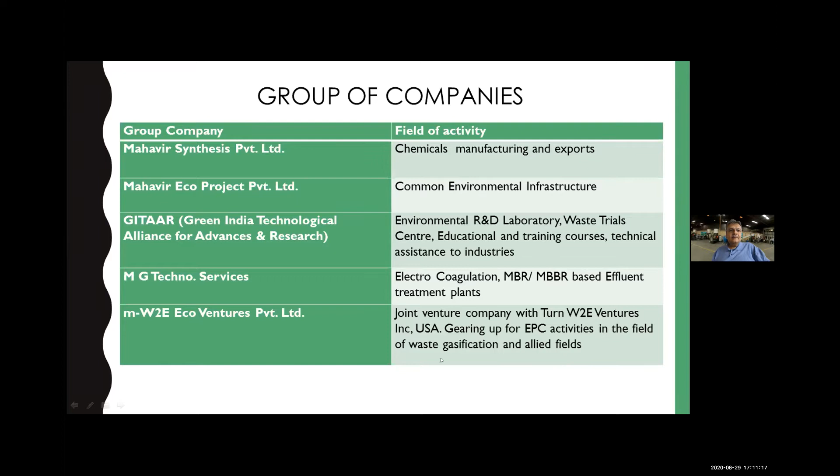Now, coming to MG Techno Services, WaterX is our brand under which we supply domestic sewage wastewater treatment plants, industrial wastewater treatment, and recycling plants. MG Techno Services basically deals in electrocoagulation based treatment as well as biological treatment technologies, which include MBR or MBBR.

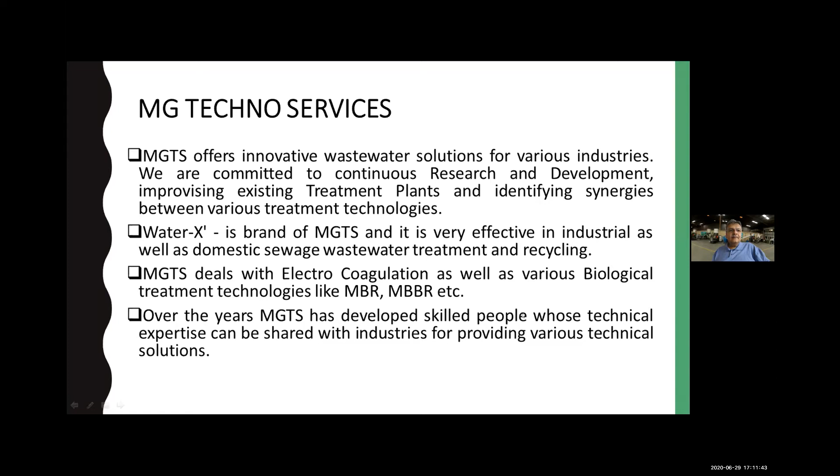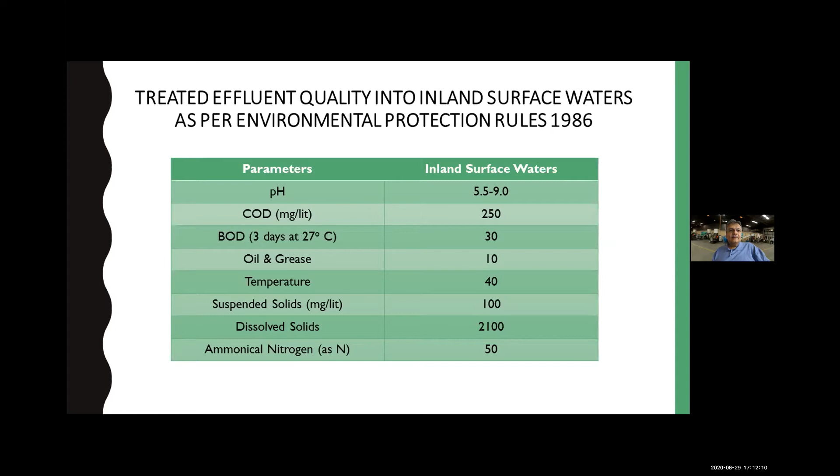Now coming to treated effluent, the statutory requirements for discharge of effluent or wastewater on inland surface. Major parameters are that pH should be in the range of 5.5 to 9, COD should be less than 250, BOD less than 30, oil and grease less than 10, temperature less than 40, and so on. We have to achieve these norms if we want to discharge our effluent on inland surface. These are pictorial views of ETPs which we supply to our customers.

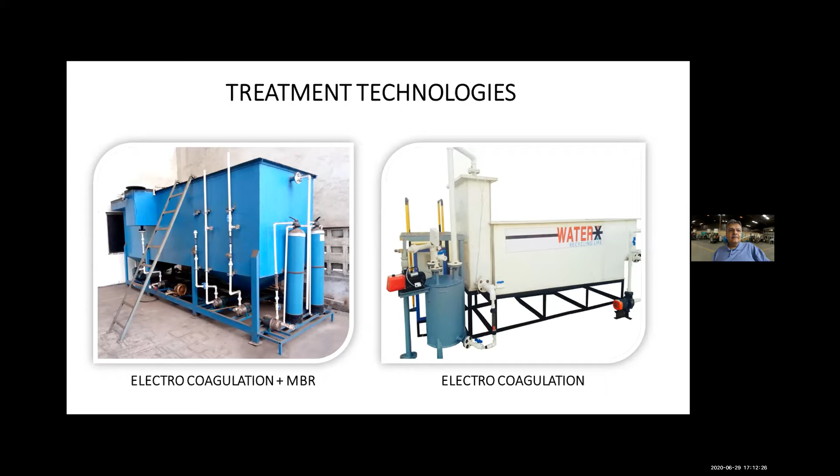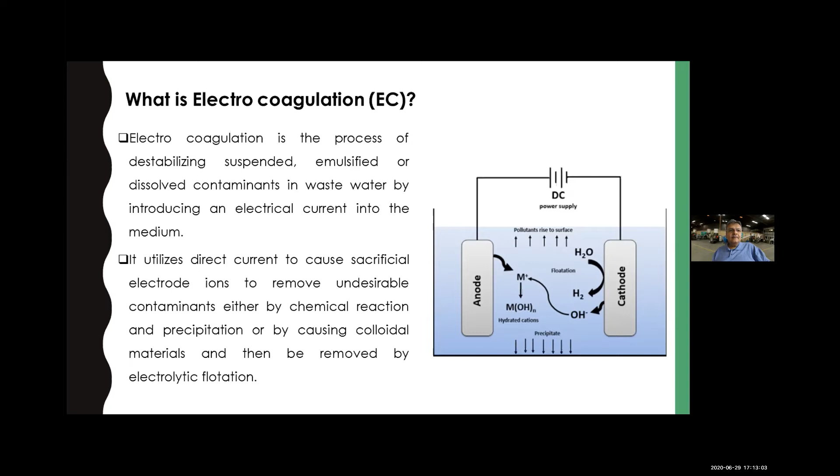Now, what actually is electrocoagulation? An electrocoagulation reactor in its simplest form is made of an electrolytic cell with one anode and one cathode. If external direct current is applied, it will destabilize suspended, emulsified, and dissolved contaminants present in the wastewater and bring them to a colloidal form, as shown in this slide. First it will coagulate, and then these coagulants combine and make a floc of heavy material that easily settles.

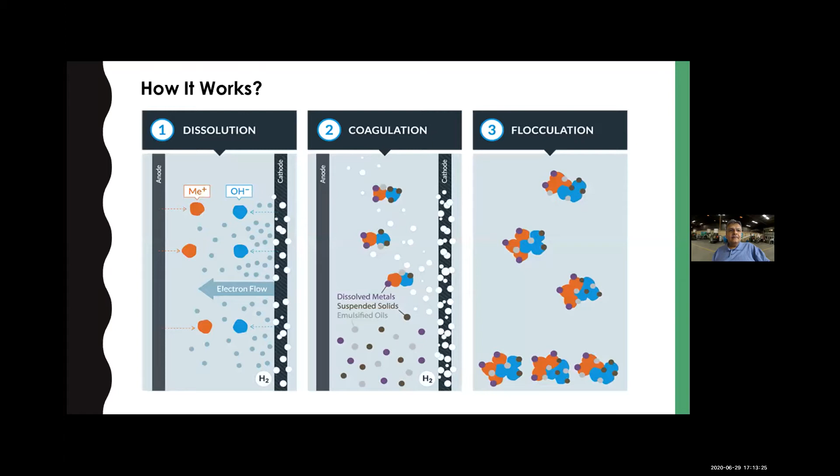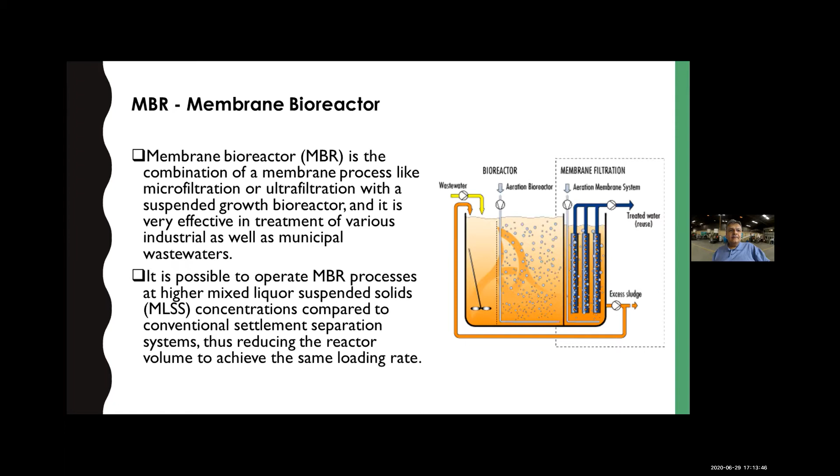Another technology which we supply is MBR, that is membrane bioreactor. It is a process in which microfiltration or ultrafiltration takes place along with a suspended growth bioreactor. It is very useful for industrial as well as municipal wastewater. The main benefit of MBR technology is that we get high quality treated wastewater, which we can reuse in our plant.

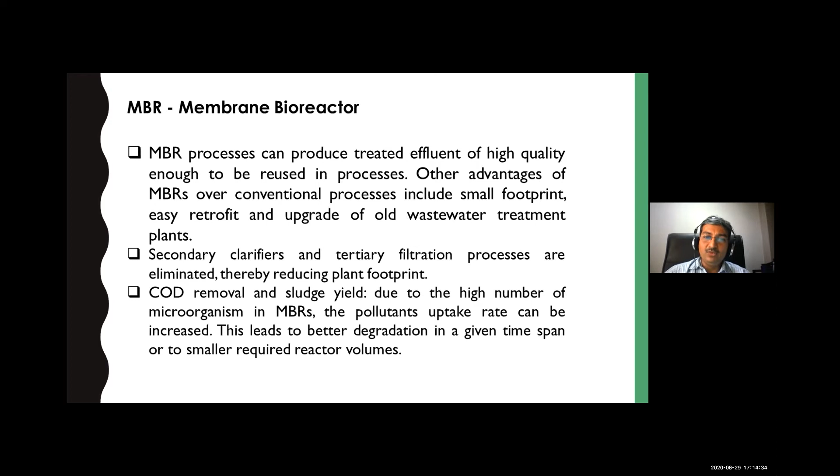If one has their own old ETP, then with the help of this MBR based reactor we can upgrade that old one also. Second important thing is that it takes a very small footprint, meaning in a very small area we can install an MBR based bioreactor, and here also COD removal is excellent. Our system works in water jet loom industries, textile industries, domestic sewage, and chemical industry. We have also taken trials on your plastic waste recycling effluent, and many more.

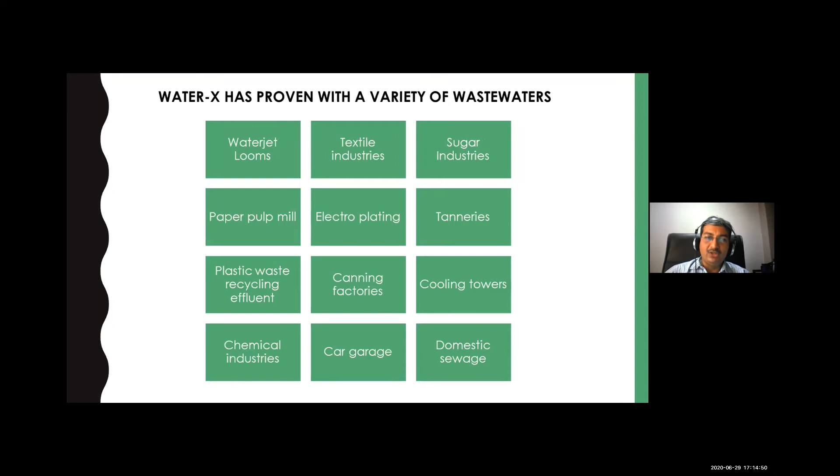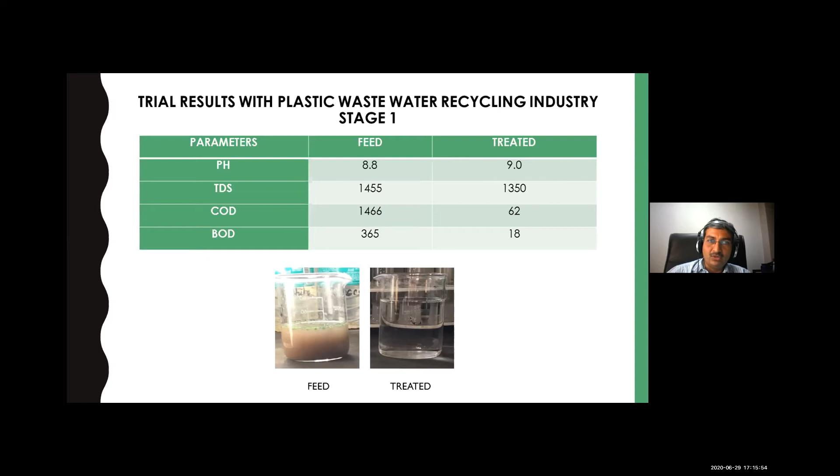Now coming to your wastewater, plastic recycling industry wastewater, we have taken a case study. We received a sample from one of the suppliers of your industry and came to know there are three major stages in your type of industry, in which the first stage has a very high level of dirt. We treated this wastewater with our electrocoagulation technology and achieved fantastic results. COD in inlet was 1466, reduced to only 62, and BOD of 365 milligram per liter came to just 18. Meaning we can achieve inland surface norms if the feed is of this kind.

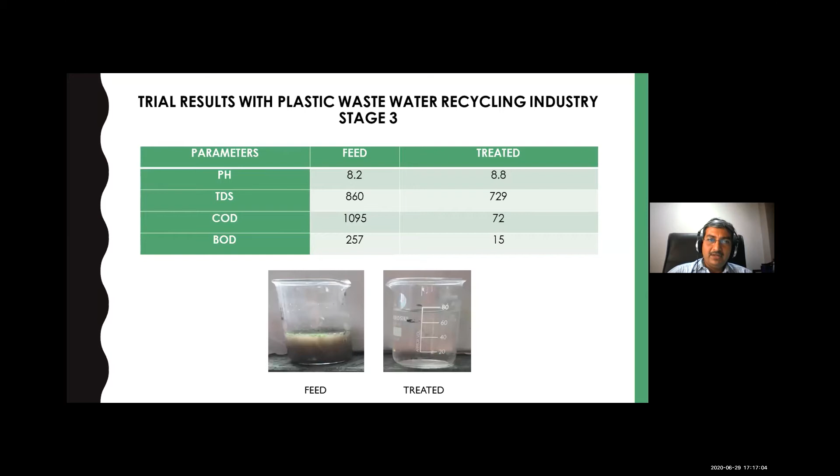The third stage, you say, is just washing or topping effluent which needs to be treated, in which COD was about 1100, reduced to 72, and BOD of 257 was reduced to 15. So whatever samples we received from your kind of industry, treatment with our electrocoagulation system has shown excellent results.

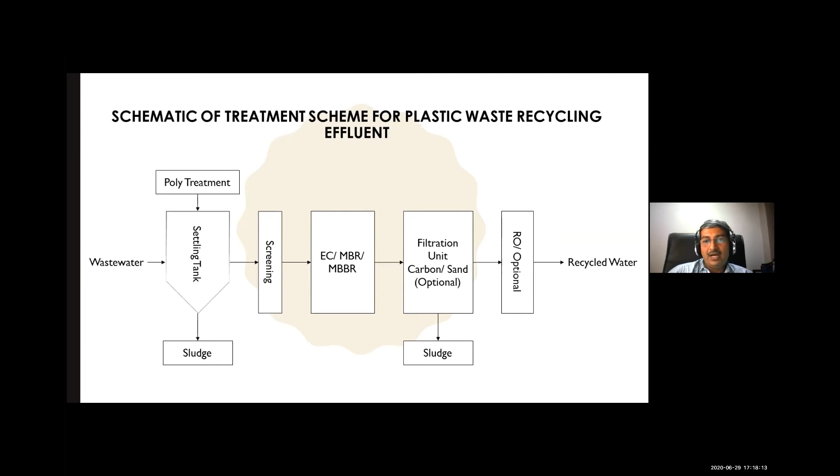Here electrocoagulation will take place, and after filtration and removal of sludge, we can have treated effluent which can be recycled also. Now, if the feed quality changes and some toxic material is very high or something like that, then we can use additionally an MBR system also. And then also, if it is not coming within recyclable range, then RO is also optional. Means everything will depend upon how the quality of wastewater is.

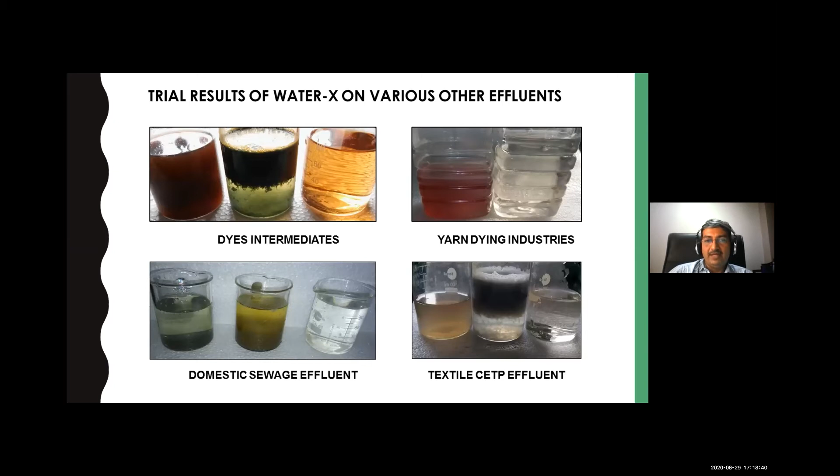I will show the various treatment trials taken on various kinds of industries. There is dye intermediate; we have shown how the feed quality is, how the intermediate is and how the final is. So these are yarn dyeing industry, which is having high color value, domestic sewage, from which we are receiving very clear water, textile CETP, food, textile processor, water jet.

Now water jet loom industry is somewhat similar to your kind, because here they have emulsified oil. In your kind of industry also, I have come to know that there is much more emulsified oil, and that can be removed also. So these are the various trials taken from various types of industries.

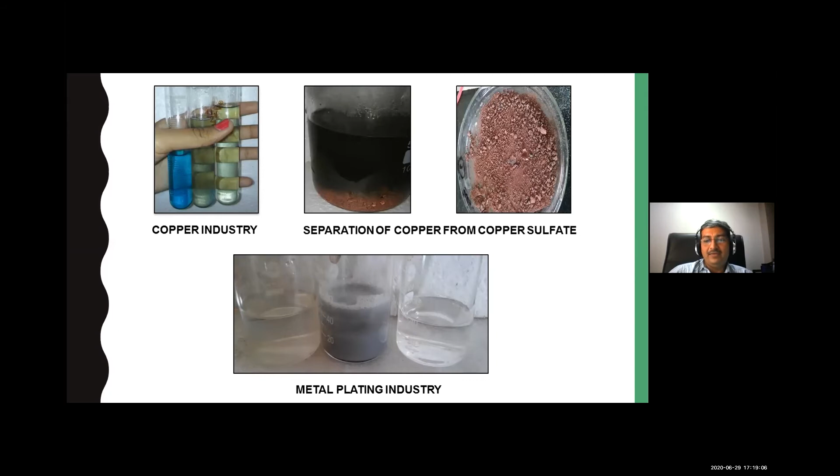Now we have customized our treatment system. We have various types of systems having capacity of 50 kiloliters per day to 200 kiloliters per day. We are considering 20 hours of operation. Now here space requirement is very less as compared to conventional ETP. For 50 KL per day treatment system, space requirement is just 12 to 15 square meters. For 75 also it will be similar. For 100 it will be 18 to 20, and like that.

Second thing is connected load power supply. For 50 KLD that will be about 5 to 6 kilowatt. For 75 it will be 6 to 7. 100 also almost same. For 150 KLD it would be 7 to 8 kilowatt. 200 KLD, 9 to 10 kilowatt.

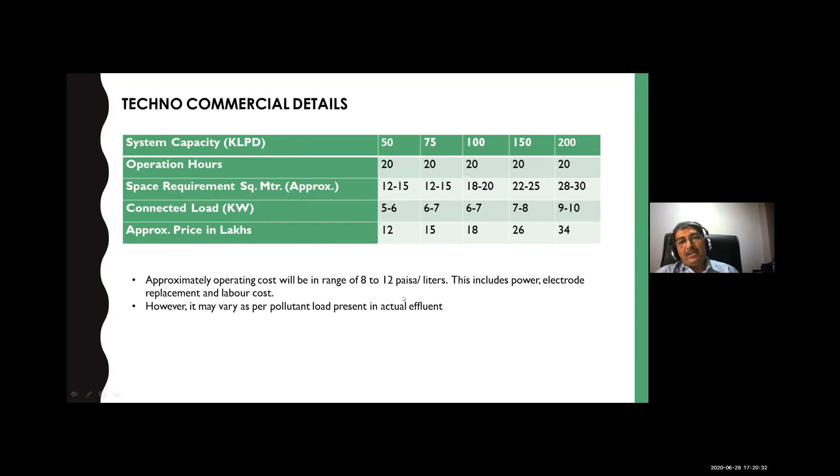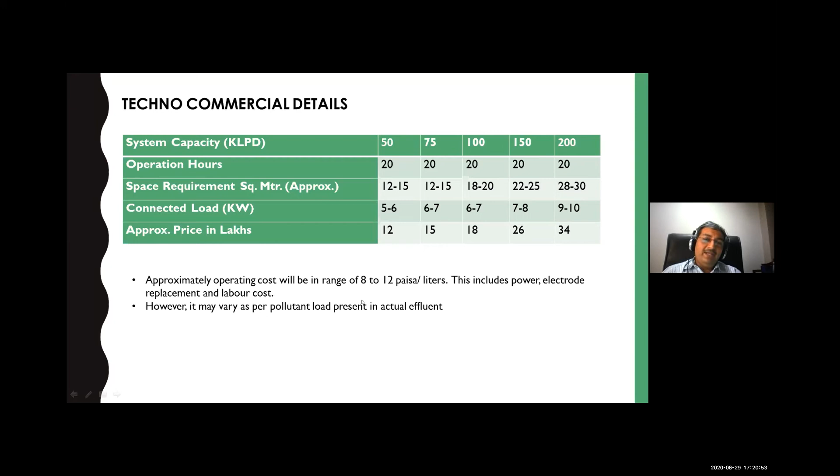Now there are many questions from your side also, that along with CAPEX, what is the OPEX also. Now we have estimated that about 8 to 12 paise per liter will be the operating cost. In this operating cost, we have included electric power, replacement of electrodes, and labor cost. However, this OPEX may differ somewhat if the pollutant load is higher or lower.

Now, taking your questions, the first one was: what if oil and grease is there? What type of agent do we need to neutralize water? As said earlier, the electrocoagulation treatment scheme is very effective in removal of oil and grease. It can handle 5% of oil and grease content, and you can get treated water without any oil and grease content. However, if you have higher content of oil and grease in your wastewater, then one may use oil and grease traps before feeding to the electrocoagulation system. So it can easily be treated.

Second question was how to reduce the clogging of small plastic particles. Right now, many fine screens are available in the market. So as a primary treatment, we can install various types of suitable screens, and we can get rid of this plastic residue also.

Third question was, will ETP plants also neutralize the smell that goes with the water? Here we would like to say that it will depend on how the wastewater quality is. However, from our experience, we have seen that to some extent odor is reduced. But if it is not reduced, and if there is a high odor, then we can install a carbon treatment system at the final stage to reduce the smell from wastewater.

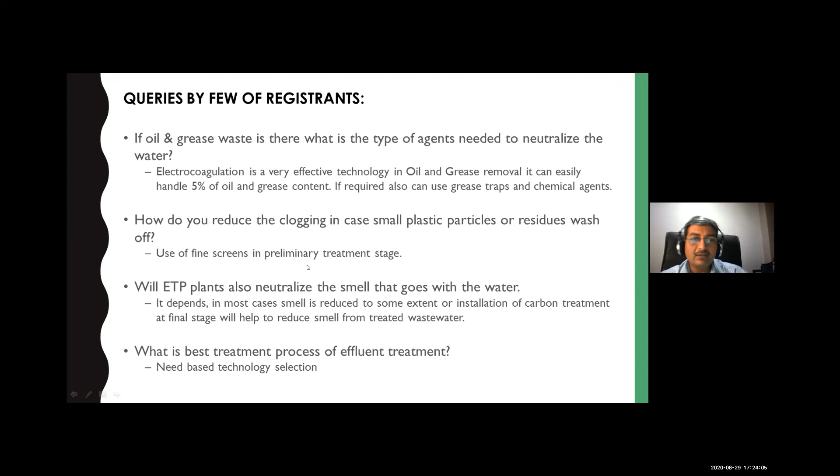Yeah, got it. Another question was what type of agents are used for neutralizing MSW waste. From MSW waste, the major part is oil and grease, and I have already informed that oil and grease up to 5% can be removed easily.

Another question was about water containing detergent, caustic, degreasing agent, and what chemical is needed to neutralize it. Biological treatment can cater to these detergent and caustic soda based impurities. So if there are high levels of contaminants, then we can additionally install biological treatment that can take care of it. And there are many cationic coagulants also available that can take care of these kinds of chemicals and reduce the effect of these harmful chemicals.

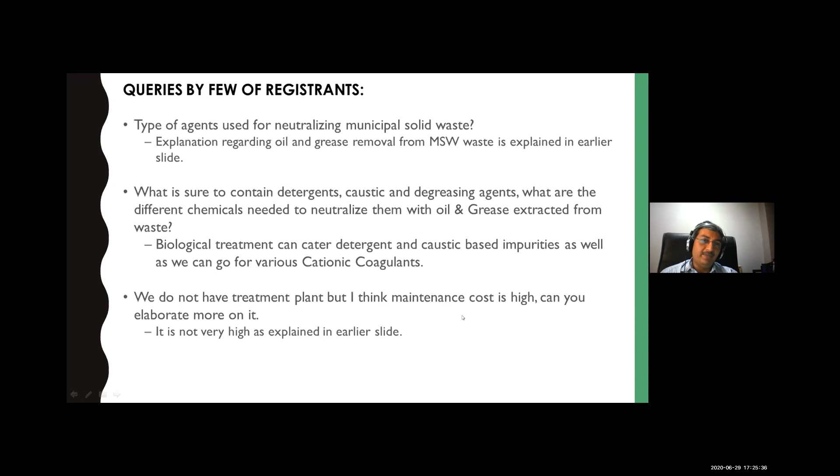One question was interesting: we do not have a treatment plant, but I think maintenance cost is high. Can you elaborate? See, I have already explained that this maintenance cost is approximately 8 to 12 paise per liter. That will depend on how the feed water is. Everything will depend upon the quality of feed water. So most probably it will be in this range only.